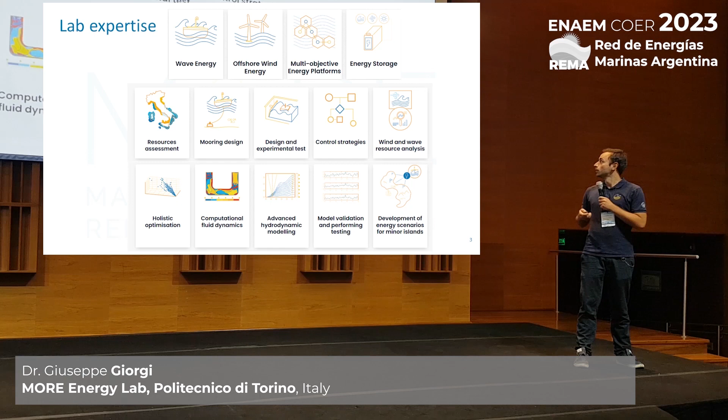So wave energy is complex. As also John mentioned yesterday, there are plenty of different concepts, working principles, very different from each other. And I'm putting these GIFs here not because I want to explain them, just because you may have been using this 2008 GIF, which I think is horrible. So we did some updated version. They're for free. They're available on our website, so just go there and use them. There's all of these different concepts and also some other ones, so you can download them and use them. I think they're better, but it's your choice.

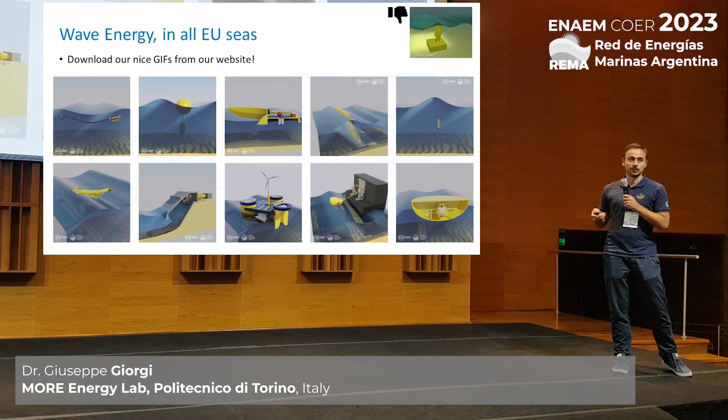So coming to the devices that we have been developing, in wave energy we developed 2 inertial wave energy converters, where the main advantage is that there's no moving part in water. Since the coupling between the waves and the hull is made through the inertial body, so heavy objects inside the hull, everything that is moving is inside, sealed, with no moving part in water, which is very good for maintenance and reliability. So our 2 devices are the inertial sea wave energy converter, which hosts a gyroscope, so we exploit the gyroscopic effect. And similarly, we developed the PeWEC, the pendulum wave energy converter, which performs the coupling with the pendulum mass. So we developed both of them.

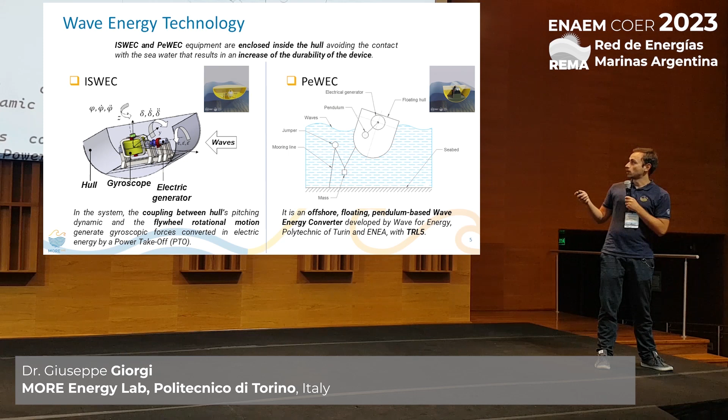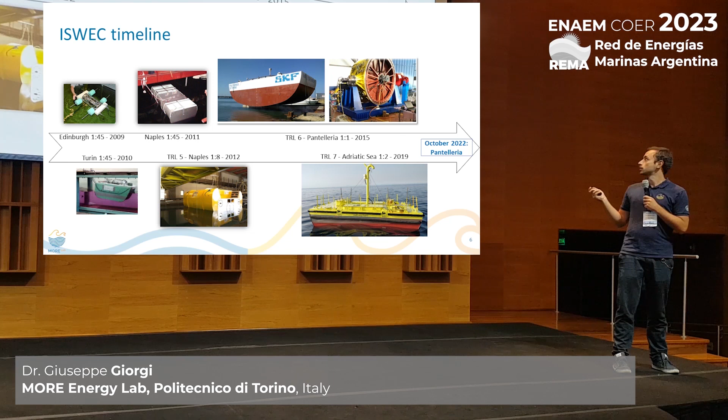Starting from ISWEC, which was the first one that really kickstarted our activities in wave energy. We started back in 2006 or 7 with the ideas and the patent. We patented pretty early. And then we went through the whole process for development, taking small steps, as they should be, from very small scale, 1 to 45, up to larger wave tank tests. And in 2015, we managed, with the effort of the group alone, to install the first full-scale device in Pantelleria Island, which is in the south of Italy. And that was a kind of turning point that was able to attract the interest of investors. And then we went back to Pantelleria with another full-scale device in 2022, actually, in October.

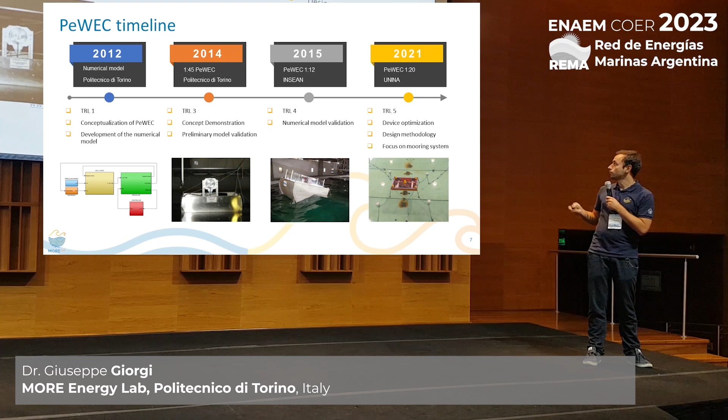A similar path was followed for the PeWEC device, staying within a research institution as the partner, which is a pendulum wave energy device. But again, we went from first numerical modeling, then wave tank testing, and then slowly increasing the complexity. And this was a test in Naples in 2021, where we did the extreme test for the mooring system. So I want to highlight a little bit better the Pantelleria case, because it was really a success story.

It's not that common to be able to install something in the water. It's also complex to install a wave buoy. Installing this guy is complex from the permitting process, as Claudio will mention in the next one. But all the modeling and the construction, the procurement, and the plenty of costs all increase several folds with respect to what you could imagine in the beginning.

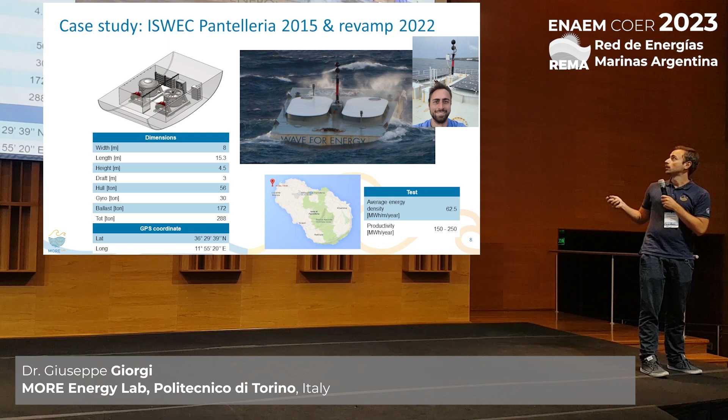So we installed it here in Pantelleria Island. This is a picture of myself from a couple of months ago. So just to share that we actually do everything ourselves. So not just staying in the lab, but all the experimental tests up to the offshore campaign. And this was a storm that we withstood pretty well, I would say.

And this really leads me to share our own views on how we want to have our research lab. So we don't want to just stay in front of our desk. And we do as much as we can in Turin, but you know, in Turin there's no sea. So we do all the numerical modeling, but also we do plenty of dry tests, which are very important in wave energy because you need to decrease the complexity of the wave structure interaction, which is very difficult to model in an accurate way.

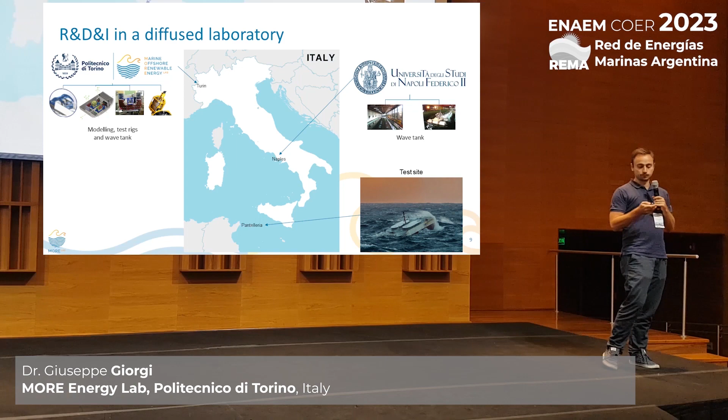So we do plenty of dry tests, but then we move to large wave tanks for the experiments. And finally, in Pantelleria, we have our own consented area for research purposes, which is available. So we installed our device there. So this is the idea of a diffused laboratory. These are just some quick views on the wave tanks.

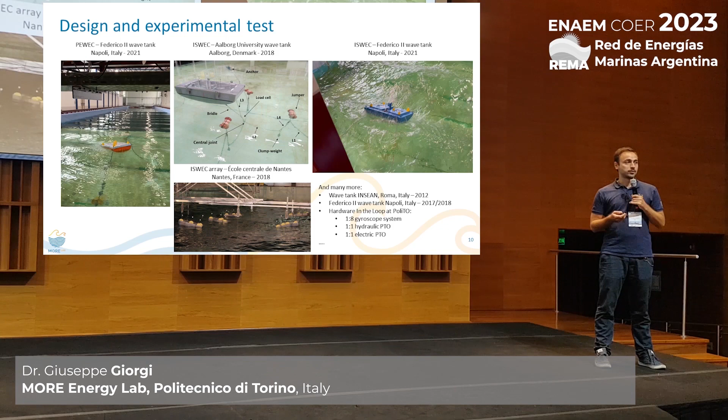So these are just some examples, but we've really been traveling around Europe with our own funds or with some European funds. So it's very important to do experiments. That's just the message. And we did plenty of them. And from each one of them, we learned precious lessons that cannot be learned in the lab.

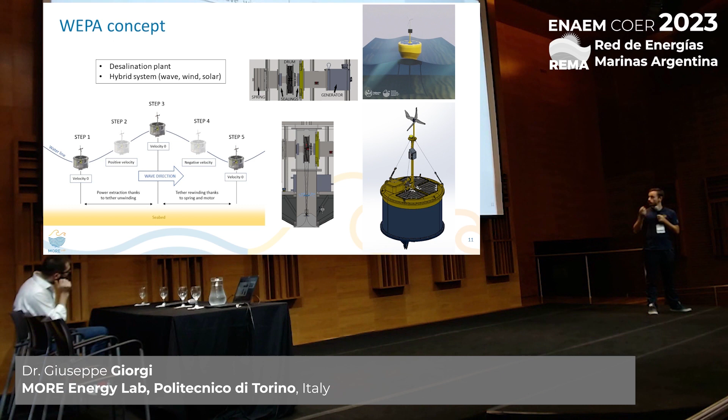We also developed this WEPA concept, which is a point absorber, so not just inertial devices, but also point absorbers, which is producing both electricity and clean water. So there is a desalination plant inside, and there is a hybrid combination of wave energy, but also wind and solar panels. So there's plenty of hype about hybrid systems, but really no one has installed anything.

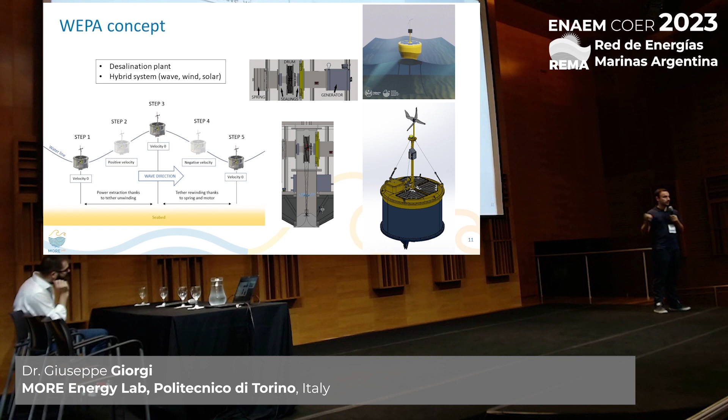So we decided to do it with a very limited budget in limited time. So it was a 3-year project from the idea to the installation. So we did the modeling and the optimization, and we finally got to construction and installation. This is on the west coast of Sardinia. And this was installed last May or June. And it's working. It's kind of working. So we had all the challenges that come with the installation, but it is working. It is there.

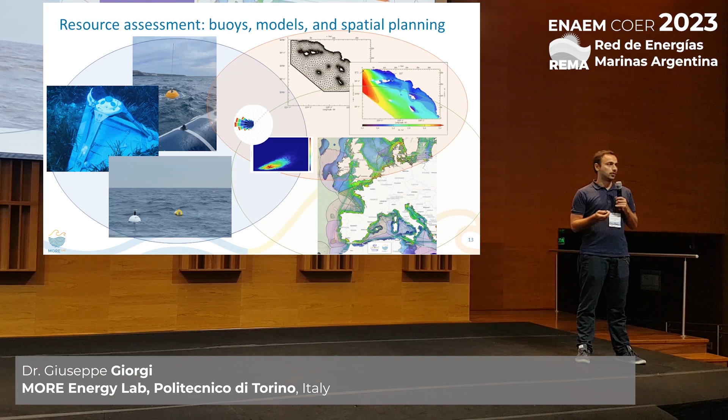But we also do numerical modeling, with downscaling approaches like SWAN or WaveWatch 3, to get higher resolution in space from the available open access datasets. And also we do georeferenced analysis of the available area. We include all the buffer zones, permitting zones, traffic density in order to select the best installation site. So we combine all of this information; for example, here in the middle, I put the statistical representation of wave and potentially wind, which really can lead the designer both for the design of the machine and the location where you want to install it.

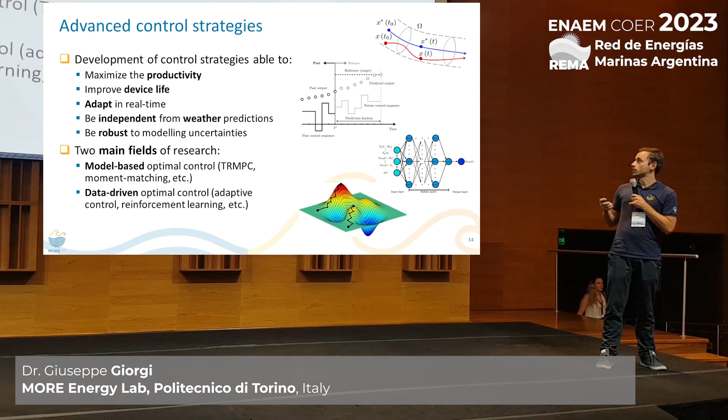And then, I'm not going into this slide, but we do all of the rest that we need to do for controlling the device. So we develop plenty of control, both model-based and data-driven, also with robust approaches. We use holistic optimization, including techno-economic considerations. So we include all the cost assessment within the optimization of the device, so you don't just optimize the productivity, but really think about the costs, which are very, very important in wave energy.

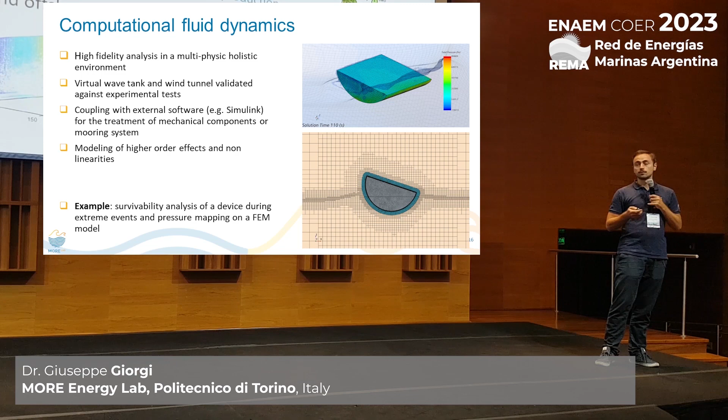And since it's a very complex problem, we do that with genetic algorithms to get to the optimal device, or at least a Pareto front of optimal devices. We do plenty of numerical models, CFD, but also nonlinear potential flow.

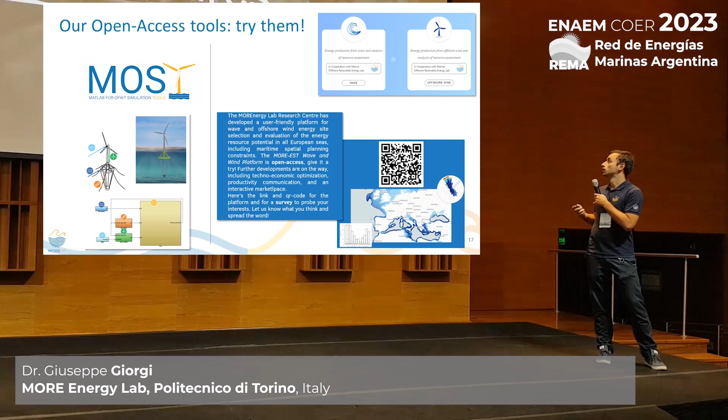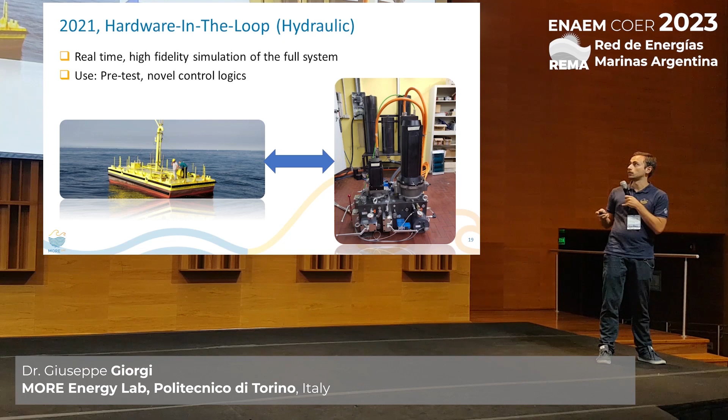So this was all the academic development part. I just want to share also some hints about the infrastructures. So I mentioned we do hardware in the loop tests. So we have a hydraulic PTO hardware in the loop, where we simulated the power takeoff of the full-scale device we installed in the Adriatic Sea.

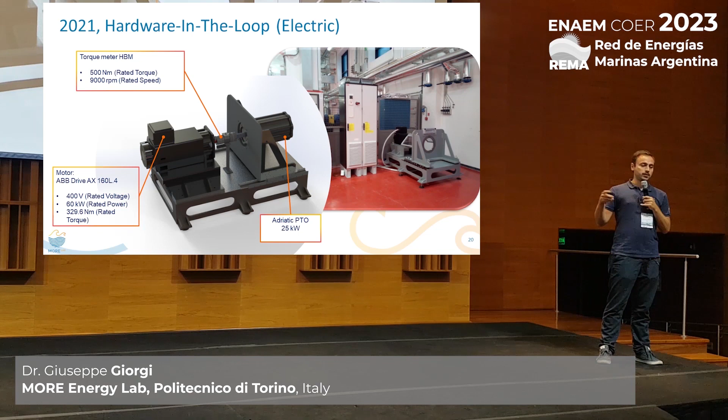We have a back-to-back electric PTO as well, for testing PTOs, for example, for offshore wind, also onshore wind, and wave energy. And recently, the last test we did was for the spring of the point absorber concept that I showed before.

And we recently installed this Stewart platform, which arrived 2 months ago. This is a 6 degrees of freedom Stewart platform, which can move up to 1,500 kilograms and 1 G of acceleration. Here we're going to test, let's see if this moves. No, yeah. So we're going to test, for example, gyroscopes moving around in all 6 degrees of freedom, so complex dynamics systems.

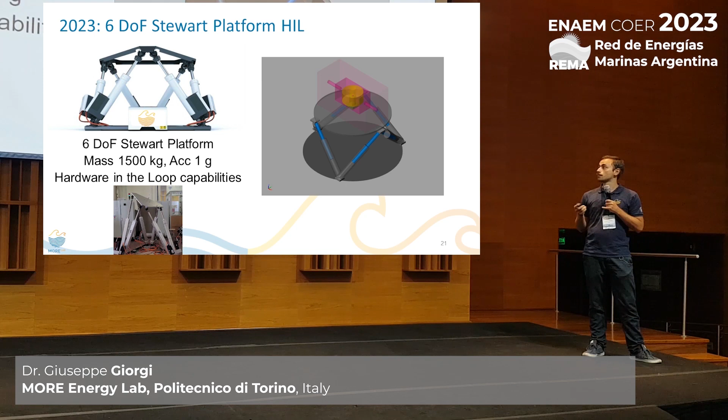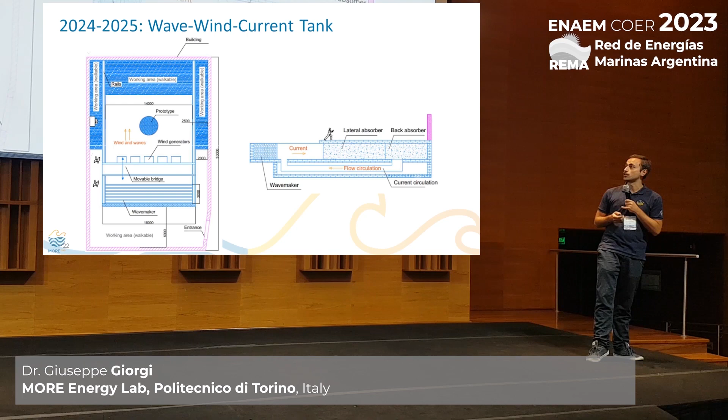And if we're lucky enough, we are going to build our own wave tank as well. This is planned for the next 2 to 3 years, which is a mid-size wave tank with current and wind, so the most comprehensive wave tank we can, since we want to make an efficient use of the budget here. So that's the plan, so we don't need to move around anymore, or as much.

And finally, we are also involved in the Clean Energy for EU Islands Secretariat, which is a European Union initiative where we are the representative for Italy, where we lead and advise small island communities to reach their decarbonization targets. So we analyze the energy system of the island, and we produce an action plan every 5 years up to 2050, so that they can actually get to net zero energy production.

And we do that in a process including all the stakeholders of the island, so there is a direct involvement of everyone, because the energy transition is not something that should be top-down, but should be a collaborative effort. And we do that from the very first moment, and I think that is very important. If you want to introduce something new in a community, you should involve the community at the very first stage. And we did that in a pretty successful way.

And finally, and I'm closing here because I'm probably long, we also do technology transfer. We believe we shouldn't restrain ourselves in the lab just for research, but we also do technology transfer because there are plenty of stakeholders also from the innovation side, and we do talk with them. So the first spin-off was made 12 years ago, Wave for Energy, which was really facilitating the engineering and construction of the device, because purchasing is not easy for a university. So we created our spin-off to have the two sides in just one.

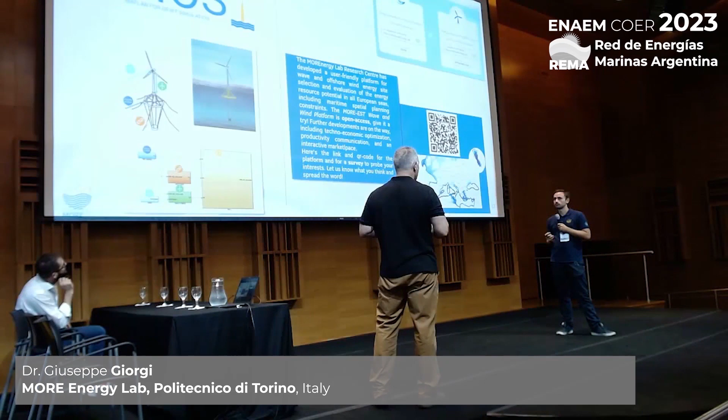Another question? I have one. Now, you mentioned this ISWEC device. Do you know how it compares the conversion efficiency with the standard devices, like with external moving parts? Well, I can just put it there. Let's put this one. Interesting topology. Not to be egocentric. Yeah, so the conversion efficiency. So the objective of an energy converter is to deliver cheap energy. So I would say the question should be kind of encompassing all the efficiency and the costs altogether.

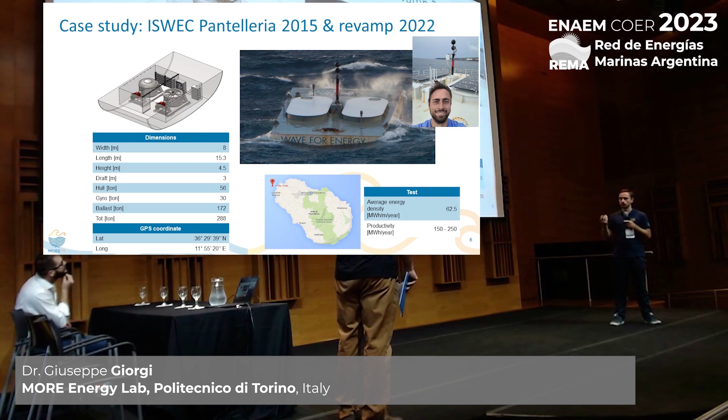So the efficiency is relatively good. It's not one of the highest efficiency overall, but the very advantage of this device is that it's all sealed. So the operational costs and maintenance costs are very low. So if you balance a good efficiency with a very, very low maintenance cost, then the overall levelized cost of energy will drop. Many thanks.

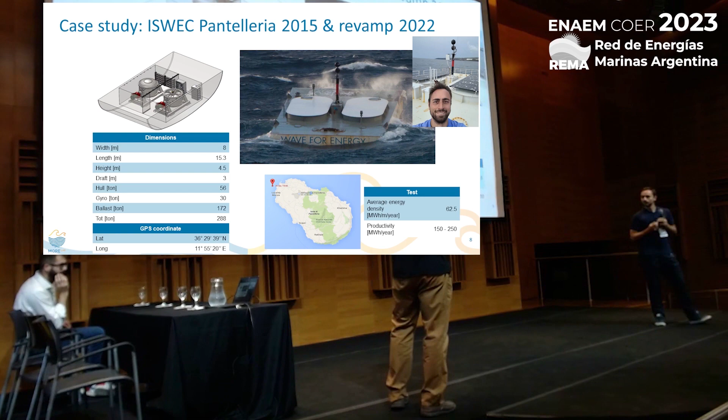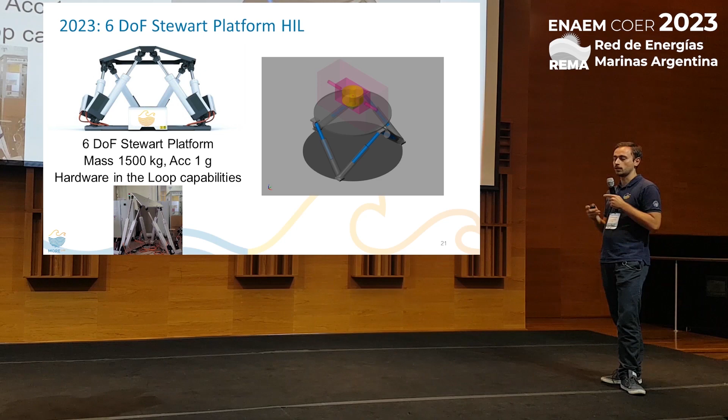And you also mentioned this Stewart platform. You know, I am from the control field side. So when is this going to be ready to conduct control tests and so on? It's ready. We finished all the installation and the checks on the machine in September. So right now there is a PhD student who's doing his own test there with a U-tank. There was a U-tank somewhere here.

Well, we have a U-tank, which is a tuning platform. Where did I see it? Well, it doesn't matter. So we are going to test a U-tank, which is a device that is usually used for stabilizing big ships, but we use it for tuning wave energy devices to ocean wave periods. And we are already testing that on the Stewart machine. Excellent. Thank you very much.

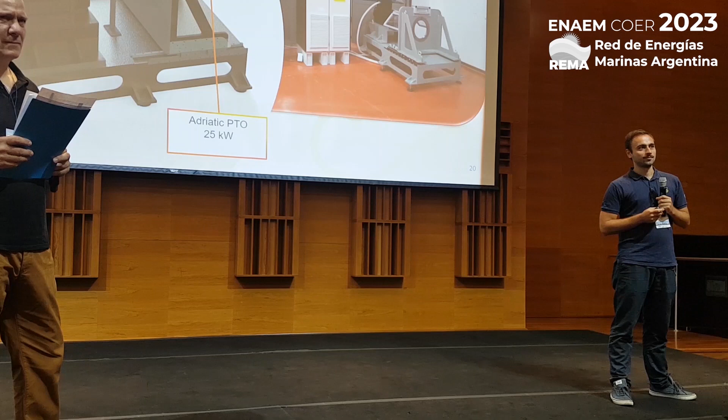Oops. It's very complicated to, I mean, like, oof. To put the devices in the sea, I think you need some permits or something. How difficult or how expensive is it to achieve that?

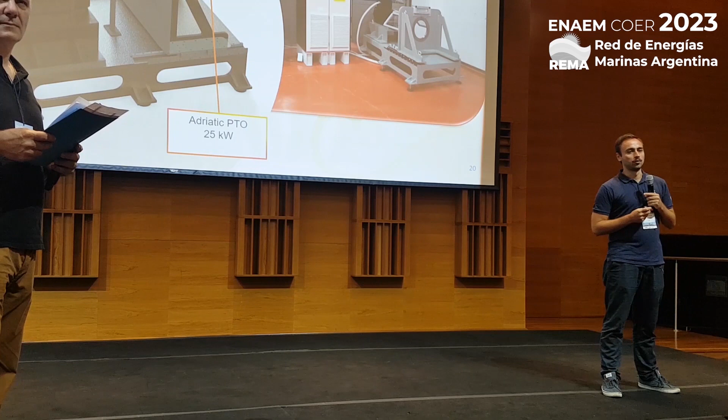For the permits and consenting, well, the next presentation will be just about that. But it is difficult. We, as a research center, managed to have a consented area for research purposes. So if you are a private or a company, then it's more complicated. Already for us it was complicated, but we managed after talking with a lot of people, but yeah, he will talk about that. On the expensive part, yeah, it is expensive, and you need to plan it very well. All the installation procedures are complex.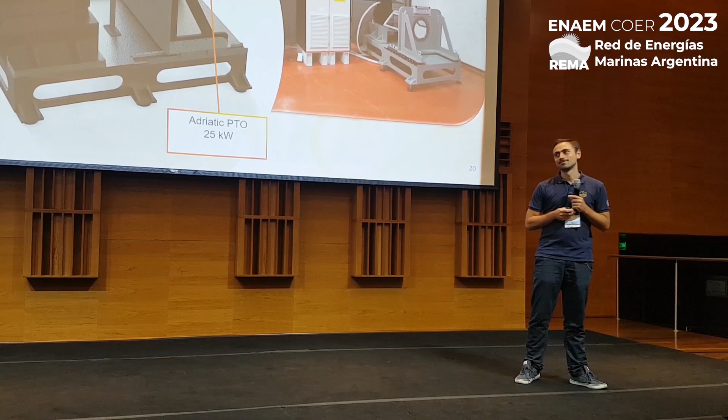You know, you need the right vessels, you need the certification. So it's a long process, but it's all learned by doing. So it's very difficult to know everything from the first moment. So you try to do it, and then you hit a wall, then you come back, you heal, and then you go back again. So it's an iterative process. That's why it took many years, but we got to a point where we understood more or less what we need to do. Any more questions? Thank you very much, Giuseppe.